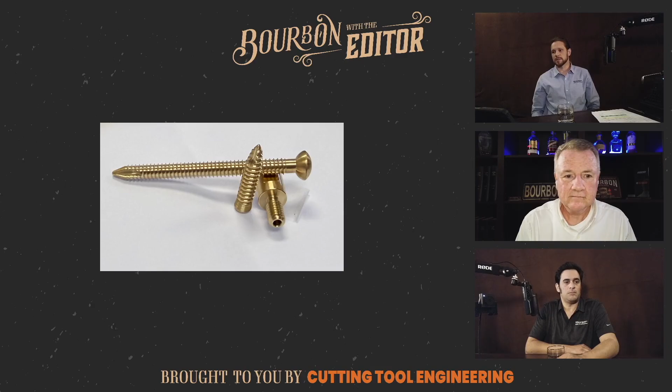This was an SR20JA. So the machine itself is a nice, small, compact footprint. It's a Swiss style machine, which we find incredibly popular, at least among our customer base. But we're not only able to offer small tools, but we're also able to offer large tools and fit everybody's needs in there.

27 different tool spots on this machine, capability to add up to 41 tools. And by doing this, it's nice because you're able to set up and touch off your tools just one time, and then they're ready for anything that you want to throw at it. So here we were running 3 different parts, but might as well be 30 different parts, right? As long as you have the right tools to work inside and outside, it's basically ready to go.

You saw earlier that we had done 3 different parts. I want to talk a little bit specifically about some of those parts. And the first one that I want to talk about is the bone screw. That was a very interesting part. So on the front of the part... Can I interrupt for just a sec? Is that the actual size of the bone screw? It's hard to know what device people are watching on.

This particular bone screw is 3 inches long. It's got 2.7 inches of threads. The thread here, I've got it written down, is a M 6.35 by 1.5 by 69 millimeters long. So it's a pretty decent thread, and we were able to whirl that, for demo purposes, in under 10 seconds, right? So whirling, it's an incredibly robust way to make a lot of parts really fast, right?

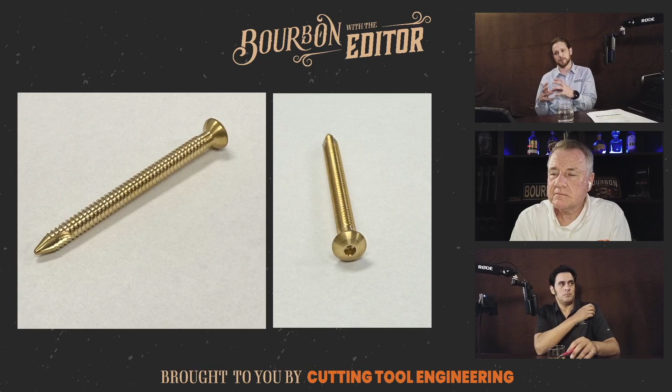And because you're working very close to the collet, or guide bushing in this case, there's a lot of rigidity. You're able to produce the same part again and again without worrying about chatter and things like that. We had quite a few different operations though on this tool. We had, I think, a video of it running too. Here we're gonna use our ST cut. We'll profile the end, and then we had an end mill come in because this is a self-cutting screw, so it needed some teeth on the front to cut into the bone.

And then we'll come up with our whirling in just a second here, and we'll get that thread cut. Let's see how fast that goes. And again, it's a thread that we made up for our purposes, but it's M 6.35 by 1.5 by 69 millimeters long. Here you go, you see the thread coming right out of the whirling unit. Huh.

And this was at IMTS. Yeah, these demos were live at IMTS, so anybody who was at our booth got to see this also. But for those of you who couldn't make it, here you go, you get to see it now. And then, back to our ST cut, and now our VG cut. We're profiling the back and cutting off. And then we'll go over to the sub spindle, and we'll start working on those operations.

On the sub spindle here, we were going to be broaching. We had a 3.5 millimeter hex on the back so that somebody could put a hex bit in there and drive it into where it's supposed to be. So yeah, there it gets drilled, broached, gets put in the ejector, and it's just that fast.

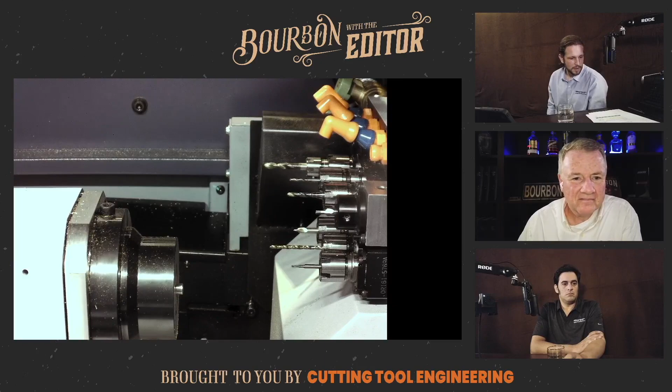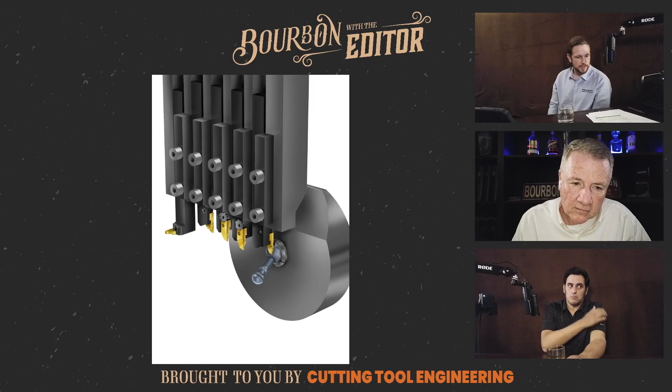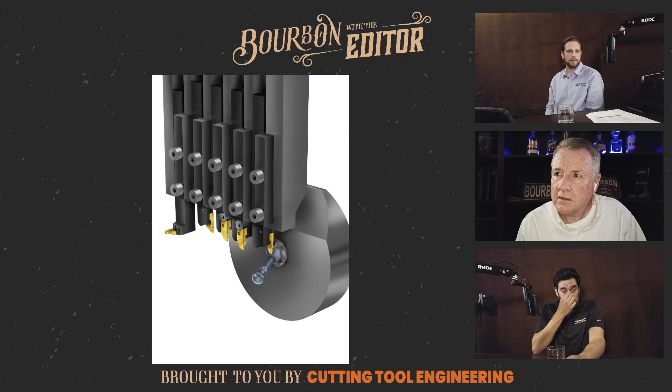As well as we have a full line of different types of tools for this system, right? So whether you're grooving, face grooving, square grooving, front turning, back turning, cutting off, threading, we have a full line of tools for this system. Is that what you're depicting in that image right there? Yeah, exactly. So it's just showing the different tools and where they would fit, which applications they would be used for. Okay. Exactly. Yep. I ask the obvious questions.

So. That's great. Yeah. And I think one of the things that makes the system really unique is the holder, right? The holder gives us an incredible amount of rigidity. It's got a dovetail in the front. The unique feature about it is its rigidity, right? It's industry leading rigidity on the system. We've done a few tests with customers, and we've always outperformed whoever they're currently running.

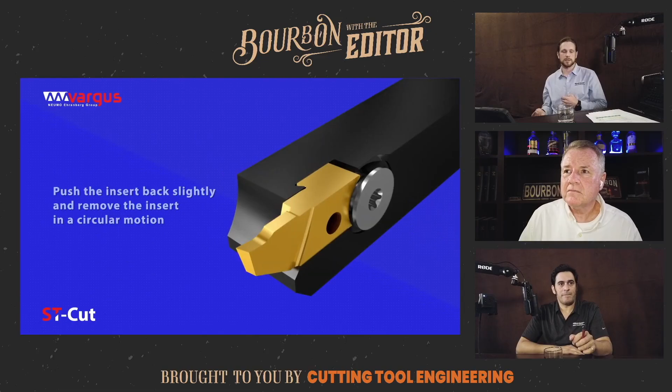The way that we achieve that rigidity is by having a dovetail system in the tool, and the screw not only holds the tool in place like a traditional screw would, but it actually forces the tool against the dovetail, so it keeps it perfectly still while it's machining. It increases rigidity, which has the effect of giving you better surface finish and longer tool life.

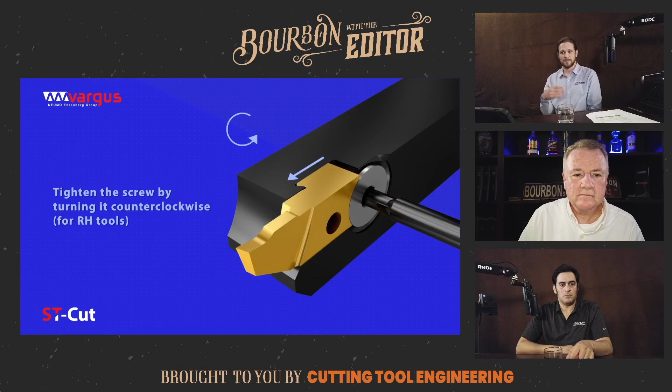So that's a really robust system, and because you can reach that screw from both sides, you don't have to take the stick out in order to do a tool change. And because it registers from the front, there's really no need at all to change offsets in between changing cutting tools. It's a turn and a half in one direction. Insert pops out, new insert pops in, another turn and a half, and it's locked in and you're ready to go. So tool change time, tool setup time, really minimized.

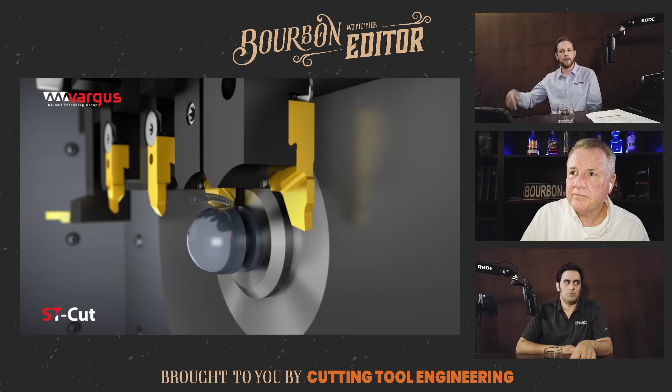Is it difficult to change the ST cut inserts inside the machine? No, no. So the really wonderful thing about that dovetail system is that you can see in most instances the tools are hanging. In some instances they're coming in from one side or the other, but that dovetail system really holds them in place, so it's a one-handed tool change, right? Yeah. Basically I can reach in there with the wrench, loosen it, grab the insert, pull it out, reach in, pop another insert in, tighten it up, and I'm ready to go. I'm not having to reach in an uncomfortable position, oil dripping on me, all that fun stuff. I'm just one hand inside.

Also, the insert is not going to fall off once you loosen the screw. It's just going to stay there until you take it off. Exactly. Which is nice. Yeah, cool. No, that's a really great feature about those, and especially with the price of carbide, you want to recover those and recycle them. Right. Yeah, always recycling.

The other system that was first and foremost on this part was the whirling system. Whirling is a very interesting system because, as I said earlier, it allows you to work very close to the collet or guide bushing. In this case, it puts a lot of teeth onto the cutting tool, and it's able to turn very fast. So we're able to get incredibly good cycle times because of its speed. We're able to get incredibly good surface finishes because we're working very close to the collet or guide bushing. And we're able to get incredibly precise threads also, which is necessary.

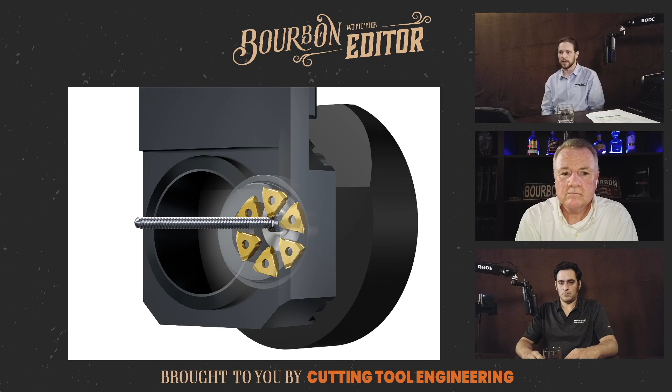And mostly this is going to be applicable in either very long parts that would tend to whip, which would be difficult and might require a secondary operation like grinding later if you were going to do standard turning, because of pressure during the threading process, or for medical parts where it's hard to form thread shapes. So this particular system that we used at IMTS had 6 triangle-shaped inserts inside of a puck. The puck goes into a driven unit, and that driven unit is stationary.

Yep. So it looks like you're cutting brass. Can Vargus cut high temp alloys? Yeah, absolutely. The medical industry that this was designed for is generally titanium or high chrome steel. The system cuts those just fine. For IMTS and for our demo, we wanted everybody to see what we were doing, and it's definitely hard to see when there's just a mist of coolant. So we did brass. Brass is self-lubricating. It allows us to really show off the cutting tools rather than just a coolant spray. It's a good demo material. Yeah, it worked very nicely.

So again, 6 triangle-shaped inserts. We can do specials also for the whirling. We do a lot of specials for them, and we've got exceptional lead times right now when you look at what our competition is doing. So if you've got an application that you'd like to check out for whirling, let us know. We'd love to be able to quote it for you, and we'd love to be able to get tools faster than the competition can.

What I think we're missing here for this one is our cutoff system. In all of our demos we had the same cutoff, but here we had our VG cut, and here you can see a picture of our monoblock holder. This is the same style of holder that we had on the machine, and you see the coolant channels put the coolant exactly where it needs to, right? So we're capable of running these with high pressure coolant, again, for those difficult to machine materials. So it's a great system.

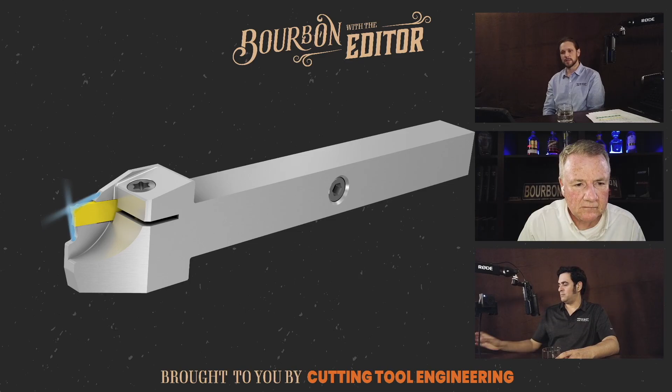Or if you need to work with it on the sub spindle and you have a round holder, it's a great application for these holders too. Yeah, I think. Oh yeah, we had the broach. We had the broach on this. What is the thinnest parting insert you have? 1.5. 1.5. So there you go.

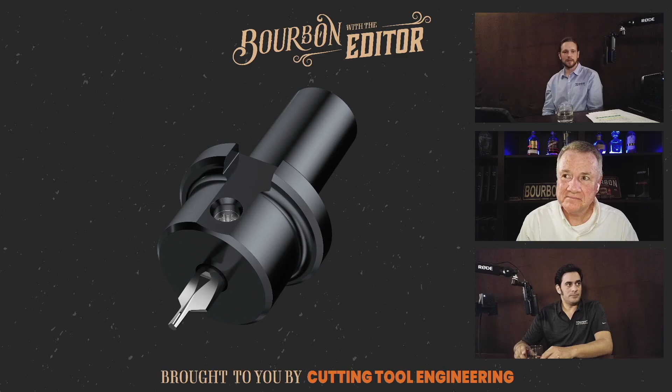Right. Yeah. So for the broaching, we do have standard hex keys and Torx keys available. And we're also offering custom, so if somebody needs something, again, feel free and reach out and let us know what your applications are. We'll get you guys sorted.

I was going to ask if you used a Genius app to pick out the tools. Oh yeah, absolutely. So the Genius app, as an application engineer, makes my life super simple, right? It's basically a conversational program. You tell it what operation you want to do, what material you want to work in, and it gives you a list of tools that are capable of making that profile for you. And then after that, it'll start to make recommendations for you as far as how to run it.

Once you get all the way to the end, it'll even spit out code for you. So in a lot of cases, you can just take and copy that code, paste it onto your controller, make sure that you've chosen the right offsets and all that good stuff, and away you go. Really that simple. That is very cool.

I mean, we've talked about the Genius system in previous episodes, and with the need for passing on knowledge, the workforce shortage, and all the rest, this is going to help everybody who is struggling with filling positions with knowledgeable employees. They don't necessarily need to be able to do every last thing, including programming something. If they can just use this app, they can perform the functions of their job.

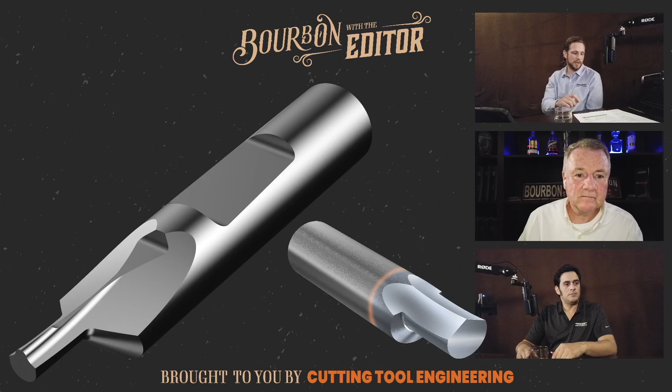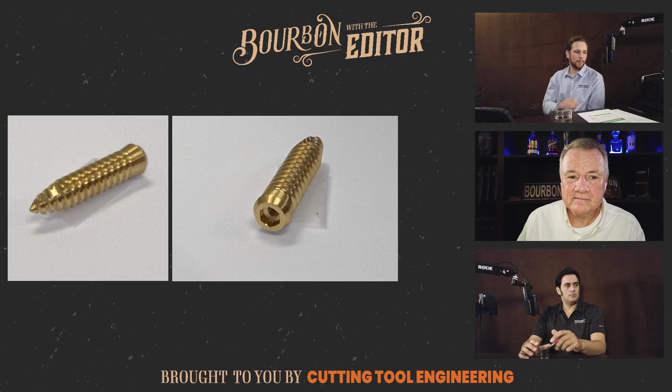Very nice. So, there was a lot of crossover here, right? As I said, we tooled up the machine once. We made several different parts with this. So there's a few operations that'll look familiar, but the thing that I'd like to focus on here is the Mach TT threading. We do have a video of this part running. If we could play that real quick.

And I'm just going to insert here that it's a dental implant, but it's way bigger than what an actual dental implant would be, right? Yeah, I mean, this one would be sized for a horse. Yeah.

Yes, people don't have to get fearful of going to the dentist. No, definitely not.

Yeah, I mean, so obviously we had some limitations, right? We had to choose a collet size. And for the sub collet, we chose a 1/4 inch collet, and that's why this is the size that it is. It's a great demo. It really is. Yeah. I wanted to point out there that on that particular operation, we made a thread that was a 1.75 millimeter pitch, 0.95 millimeter profile height in 4 passes.

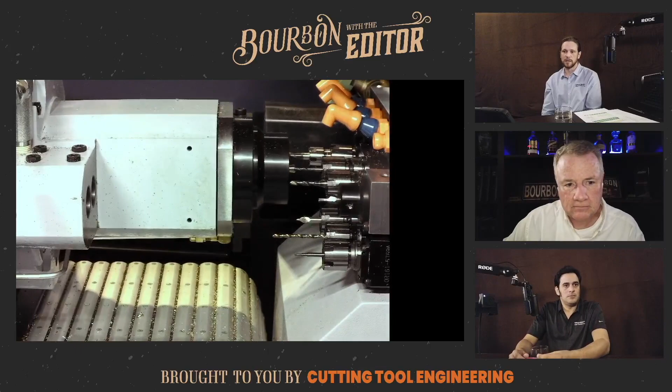Okay, and is that what we're looking at right now? No, right now we're looking at the broaching, so it was like that, right? Oh, okay. It was very quick. The Mach is an incredibly robust tool. We're able to run it extremely fast and extremely hard and get extremely good tool life out of it.

The particular thread, there was actually 2 threads because we used a partial profile insert for that. So the first thread, like I said, was a 1.75 millimeter. The second thread was a 0.5 millimeter, and using a partial profile insert allows us to cut both of those with the same cutting tool without having to do a tool change, right? So we're keeping the tool right there. We're reducing cycle time even further by doing that.

And I know that we've got a couple of, oh, there it goes. They're going to play it for us again. That is amazing. Yeah. That's the 4 passes? No, this here, they're going to come up and cut. Again, this is a self-cutting screw, so it's going to need a couple of teeth, so we're milling those in. And then we'll come back here with the ST cut, cut the profile. Notice there's 2 different angles and a flat and a straight section on there. So that's that thread, and there's the second thread, and it's all done that quick.

Right? And people will say, hey, it's brass. Of course you can cut it quick. Well, we've had plenty of tests recently for customers where we've cut in steels, in super alloys and things like that, where we've reduced cycle time 60% or more while increasing tool life. This is an incredibly robust tool. Yeah. I don't think dental implants, I could be wrong, but they're not made out of brass. They're definitely not made out of brass. Yeah, this would generally be made out of something like titanium.

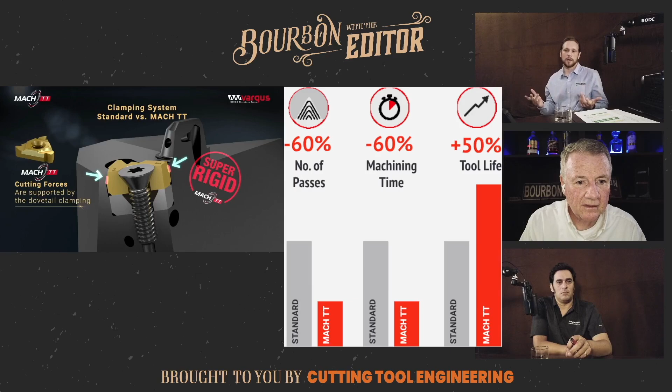And so when the cutting tool comes under load, it's forced down and into the pocket, and it's held in 3 points. So it's extremely rigid, it's extremely stable. It doesn't vibrate, it doesn't wear out, and it just keeps cutting. And because of that rigidity, we're also able to push it extremely hard, extremely fast. That's a good look at it right there on the screen.

Yeah, certainly is. And the Genius again. This is available in the Genius. It's a great way to get speeds and feeds for this cutting tool and for most of everything else that we offer. I go right in the Genius. I tell it, hey, I'm doing this material. I want to use this system. And it'll give me everything I need in order to be successful.

And a lot of our customers are like, you want me to run my machine how fast? Yeah, yeah, I do. I want you to run it that fast. Okay. And we make believers out of them one at a time.

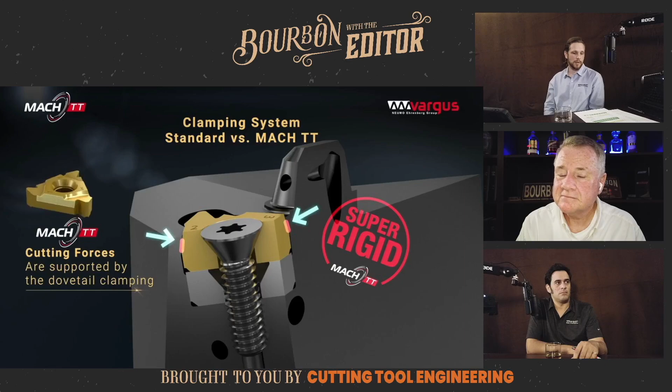We do have one more. It's the medical extender in this case. So, again, we did turn the geometry and the OD with our ST cut. We threaded the external threads there with the MACH, and we opened up the inside with our micro tools. And also we have an internal thread there that's done with our microscope tools.

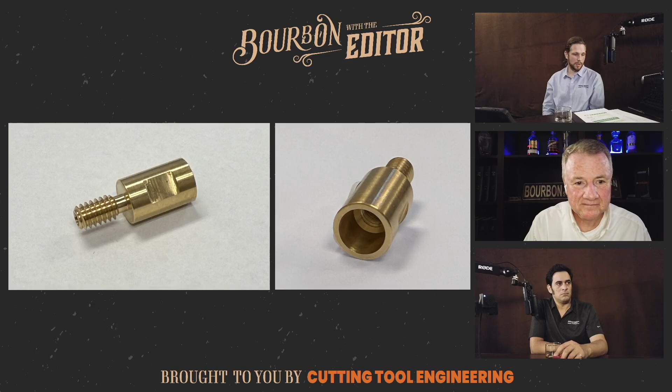You guys have already heard me talk about the MACH quite a bit, so we can probably jump right into our boring and microscope. So here's a little bit of a look at some of our offerings for microscope. And just like the ST cut, we've got, again, an incredibly rigid system that holds these, and we've got a lot of different profiles if you want to front boring, back boring, grooving, threading, everything in between there, pre-parting, all that fun stuff, chamfering.

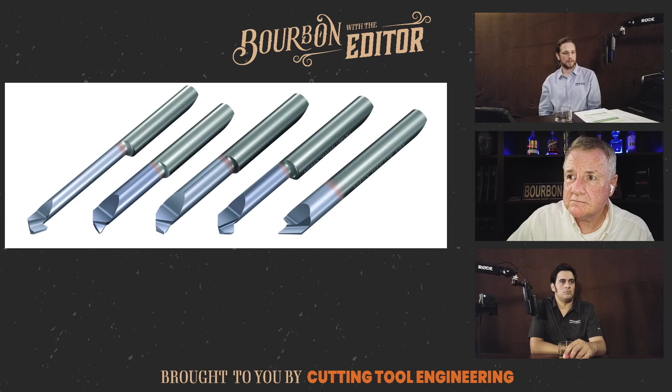What is the smallest boring tool diameter in microscope? It's around 1 millimeter pre-drilled hole for the smallest. Yep. So yeah, and we've got again ability to make specials in these and everything else we offer. So, you know, especially if you don't see it in the catalog, give us a call and we'll get you sorted. Yeah, there it goes.

So this is typical of our double-ended holder, which would allow you to increase your tools on the machine. A lot of them will hold one tool. We're allowing you to hold tools on both sides so that you can work on the inside of your main spindle and your sub spindle.

What do you offer for chip control? So we have quite a few different chip breakers, quite a few different coatings, as well as optimizing speeds and feeds, right? So we have a lot of different ways we can tackle that. It's going to be a little bit dependent on the machine that you're running, the coolant that you're running, the material that you're running.

There's quite a lot of variables that go into it, but again, we're a highly technical team of application engineers, and we're here to support. So if you have one of our cutting tools or are looking at one of our cutting tools, feel free to reach out to us on the website or on the phone, and we'll be there to make sure that you get the best possible performance out of your Vargus tools.

Can you face groove on the microscope? Yeah, we have face grooving, we have ID grooving rather. I guess we could do OD grooving with it too. I mean, a groove is a groove, right? The clearance angles might be a little bit different. That's what I hear. But yeah, a groove is a groove. But yeah, we have face grooving, and I don't think we had a picture of that up there, but what else do we have to cover on the microscope?